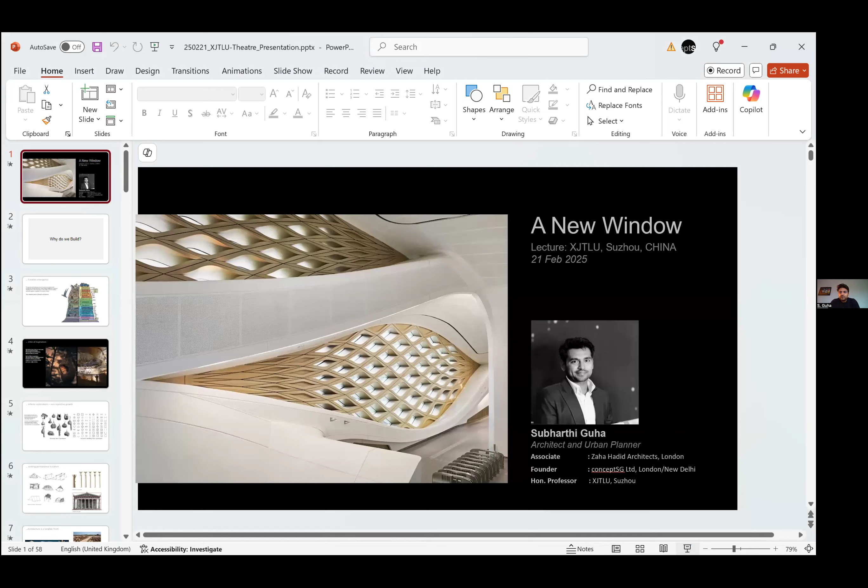Yeah, the recording is ongoing. Can you see the full screen? We can see, yes, now we can see the full screen, and it's all yours now. Okay, great. Hi everyone. I can't see them. That's very strange. You can only see me, yes. Yes. Yeah, wait a second. Let's do this way. Yeah, that's better.

Good. So hi, I'm Subharthi Guha. I'm based in London. And I think today's lecture, I prepared it for you guys, and it's called A New Window. I think the lecture should be read more as a philosophy in architecture, and that's why I've split it into three parts.

The first part is about the fundamental philosophy. The second part is about the kind of steps that engage us into architecture, and I'll show you some examples with some of my buildings. Then the last part has got some references of theater projects at Zaha.

But, and I think the target would be that none of your projects should look like that. They should look different. So I put those examples, but not going too much into how they were done.

So let's start. And I think I will start with a generic question, and this is where I want you guys to speak up a little bit. The question is, why do we build? I would like at least 2, 3 answers from you guys. So anyone can speak up.

So why do you think we build? Okay. Anyone? Anything? Just throw in. It doesn't have to be correct.

Did you hear that? Somebody said shelter. Shelter, yes, that's correct, one of the reasons. Anything else? Remembrance. Sorry? Remembrance. Memory, yes, very good. Anything else? In our daily life basis. For your daily functions, okay.

Okay, I think we've got somehow a kind of 2, 3 items, but let me try and put this together. So the genesis of architecture is not because of man. It goes back, as you said, because of shelter, because of protection against the weather, because of search of food or hiding from predators.

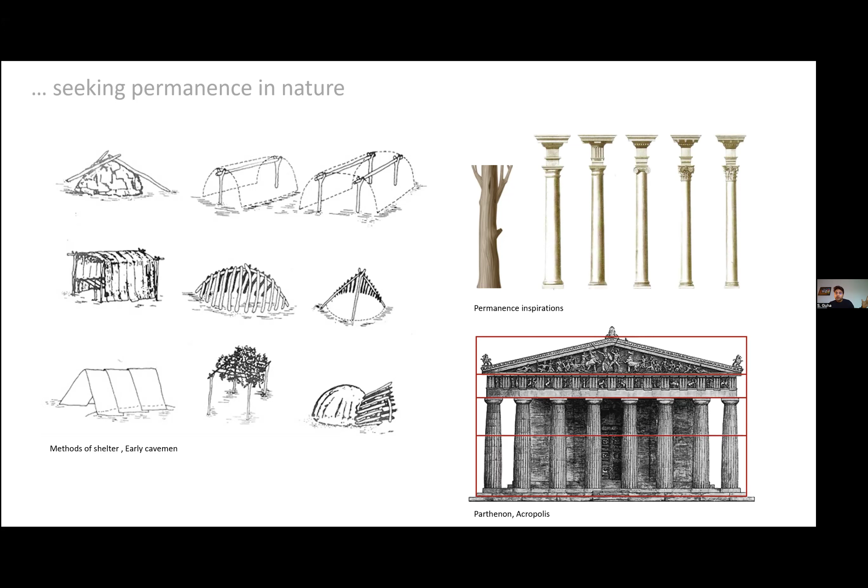So whether it could be texts or it could be architecture. There's an issue with the text. So then first go through this. Then that level of permanence came from the early forms of Greek architecture, for example, which were very much derived from wooden structures. All the designs, even though they were built in stone, you can see the designs reflected the purlins, the rafters, the sloping roof, even though they didn't need to. But it was a kind of inspiration from the transition of what they were building in wood into a much more permanent structure, which was concrete or stone.

So, why architecture? Why not just have documents and that's it? Why does transfer of knowledge need architecture? Because it is the only tangible truth. When you go visit a building, you want to know how it is built, and that knowing is there for you, and everybody who's going to come can see that. You don't need literature to understand how the structure is standing. It's quite easy that these are the logics and therefore it's standing.

However, if I had to document these in history, it can be rewritten in many ways. So if there is no tangible reality, I can write history in the way whoever is in power and whoever wants to dictate their terms. So therefore, history in the long term, let's say 200, 500 years, can be delusional. Therefore, architecture remains one of the only truths that carries through centuries our knowledge.

So this, as you can see on the top right, people took firstly a lot of effort, and I think one of you said functions, but on the left you can see the building construction, what we imagine happened in Stonehenge. But this building construction in Stonehenge was not built for shelter. So not necessarily was architecture being built for shelter, but it was built to pass on a certain set of aspirations. On the right-hand side, you can see the early city on the top in ancient Egypt called Luxor, and how the curved walls are there. Then you see a bottom image of Dieste, who is a very 20th century architect, late modern architect, continuing this experimentation in different forms.

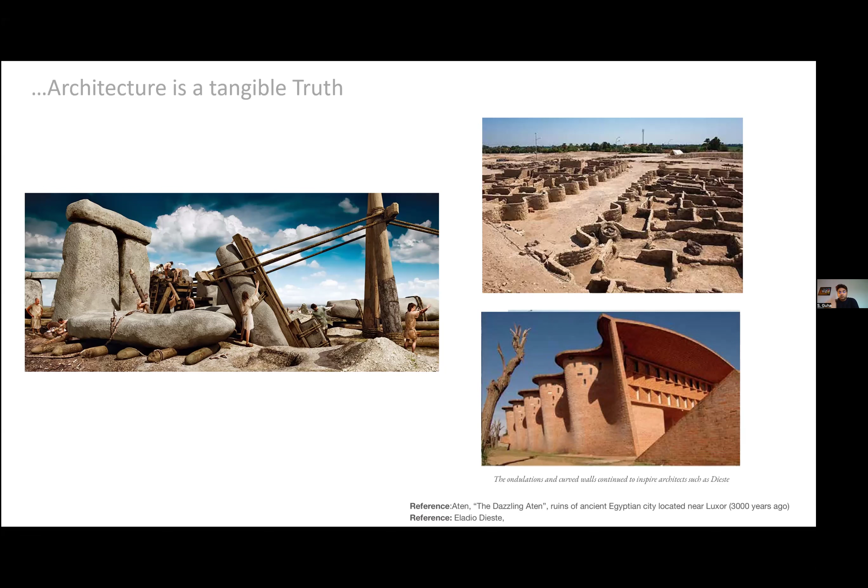But you can see the relationship, and this is across 3,000 years, you see the progress. So in between the 3,000 years, you could say there was very little progress in this typology, in this methodology. That is what I mean in terms of growth of architecture. So therefore, when you put it together, it's not just function, it's not just shelter, it's an inherent doctrine of human aspirations when you look at architecture across centuries. So that's, let's say, the first half of my talk, and hope it's making sense.

Then comes the next question. If that is the case, and if the true spirit of architecture lies in this transfer of knowledge and in this experimentation, so what are the things to look out for the spirit of architecture? And that's where I call it the pneuma of architecture, which traditionally translates into spirit. For the first chapter, which I'm going to talk to you about today, the second half of the lecture, it's about that individual spirit. What does it mean to have that relationship between space, between architecture and us? That's the first thing that you should know when you're designing.

So first thing out of this chapter is object and space. So there is, for example, if we have a site or if we have space, let's call it space, and I put an object in the space. Therefore, the object is balanced in space and I'm looking at the space. Now, for example, I move the object in the space. This changes everything. This changes your perspective of space inside there. This changes where the object is. It's the same object.

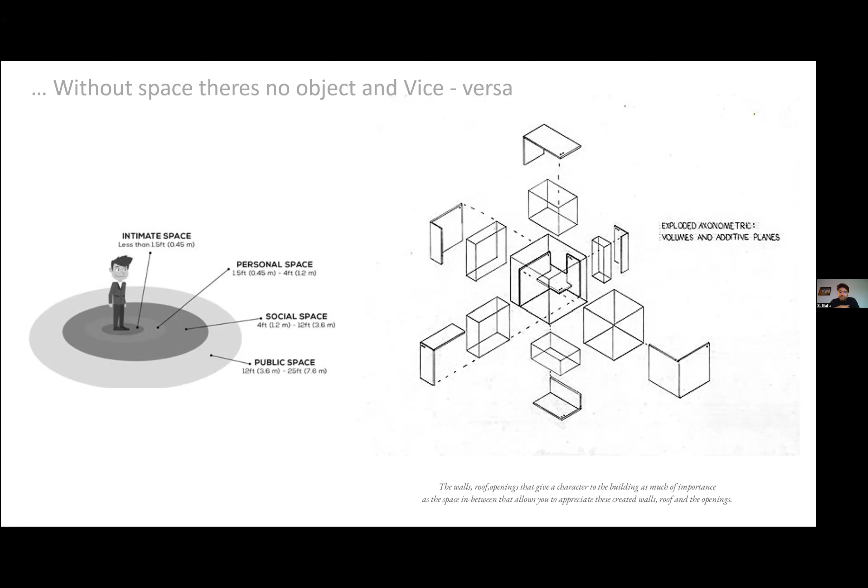Which leads to the second chapter: once you have these objects that you want to design in space, what do these objects become? The first thing the objects start to become is based on your articulation. So whatever is your articulation starts defining the object, and hence the space.

Usually there's a mistake that articulation leads to style, or is documented as style, but I don't think that's very important, what style it is. I think the articulation itself is important—the experimentation with the articulation, which gives you the form. And therefore, you would see more articulations.

So once you've mastered your version of articulation, whatever you're going to design, the next requirement for architects is the art of precision. You cannot build buildings without being precise, and this is quite important. The challenge of translating imagination into a construction and a building lies in the art of precision.

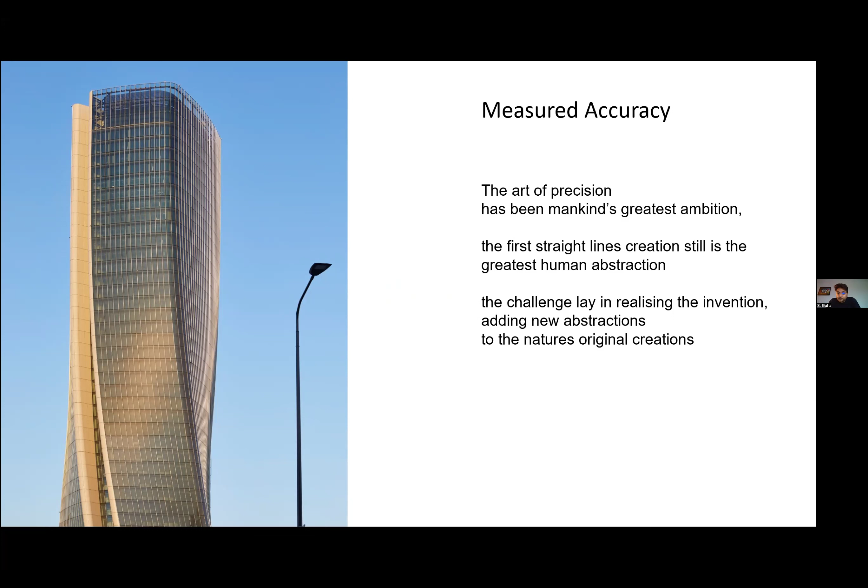I know there's a very big culture in universities to fake it, and I went to university, but I think the precision in reality is what gives you the leverage to create spaces that are for the future, that haven't been designed before, that haven't been done before.

One of the things I always say is that the straight line has been the greatest invention—it does not exist in nature. The role of the architect is never to replicate nature, but to be inspired from nature and be able to create something that doesn't exist in nature.

Moving on, I'm going to dive straight into a project in Milan that I did years ago. You can see here that we have created this tool system. First we had the design, and then we created this tool system to be precise enough and give the design more formal logic and shape. As you can see, everything is different.

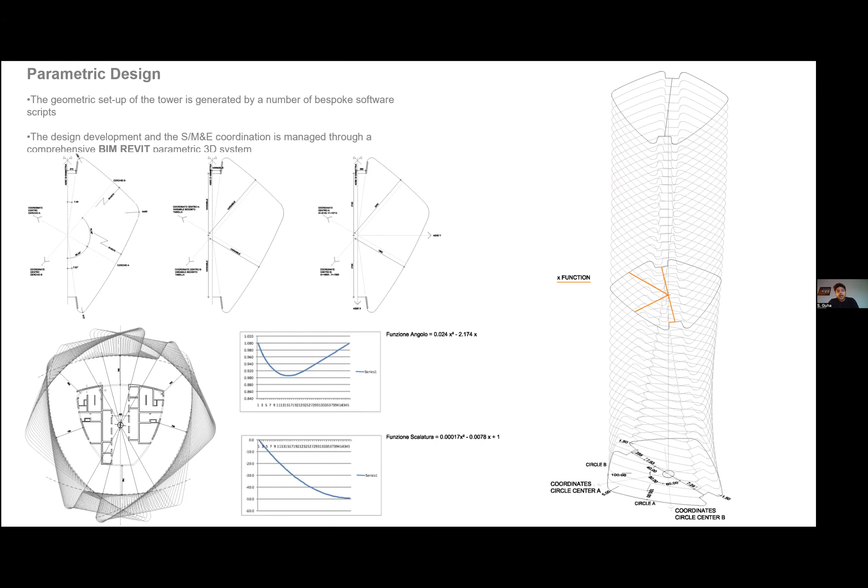And all of this was generated by a tool. So you can see here, this video tells you how these curves were plotted, how they stack up, and how the curves are generated for the floor plates and so on.

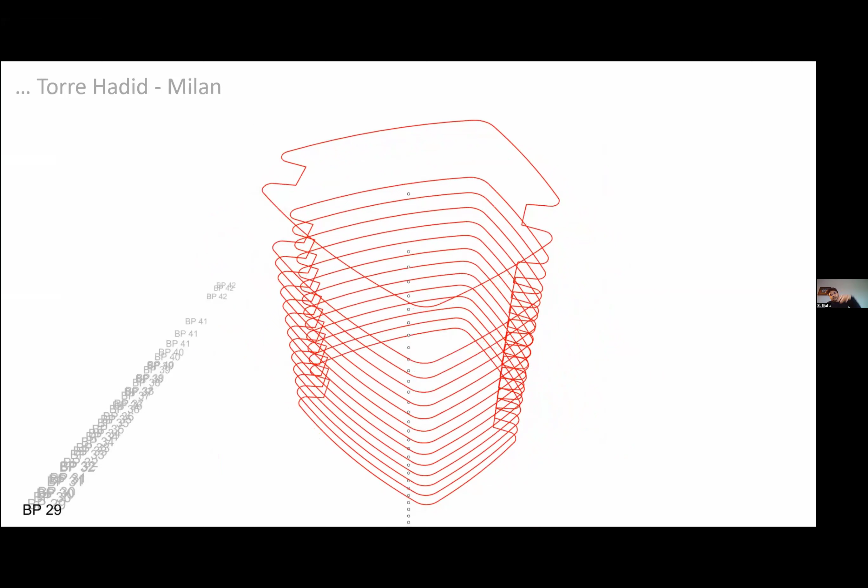I'm going to move a little bit fast—it's a long video, but you can see the center point, and as soon as these floor plates are developing, the division of the facade here, the optimized division, how much you can make it more economic and efficient for the glass panels.

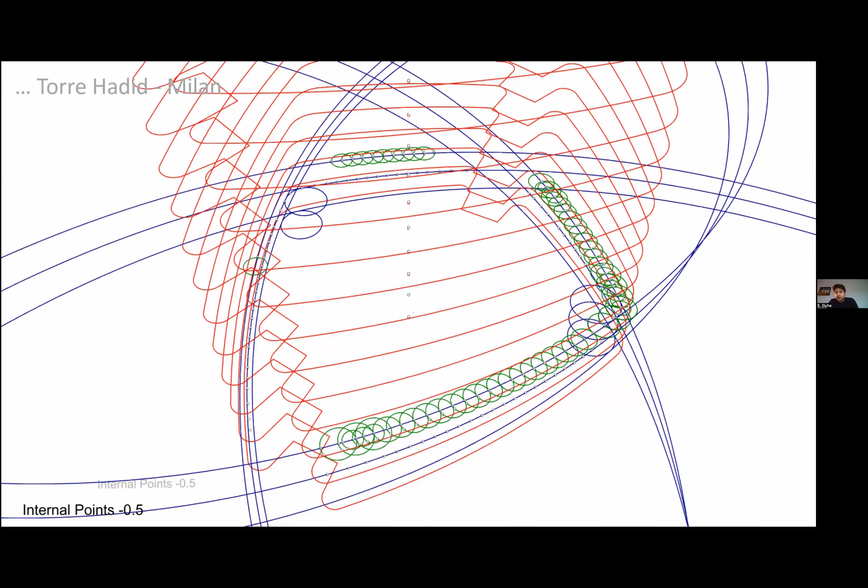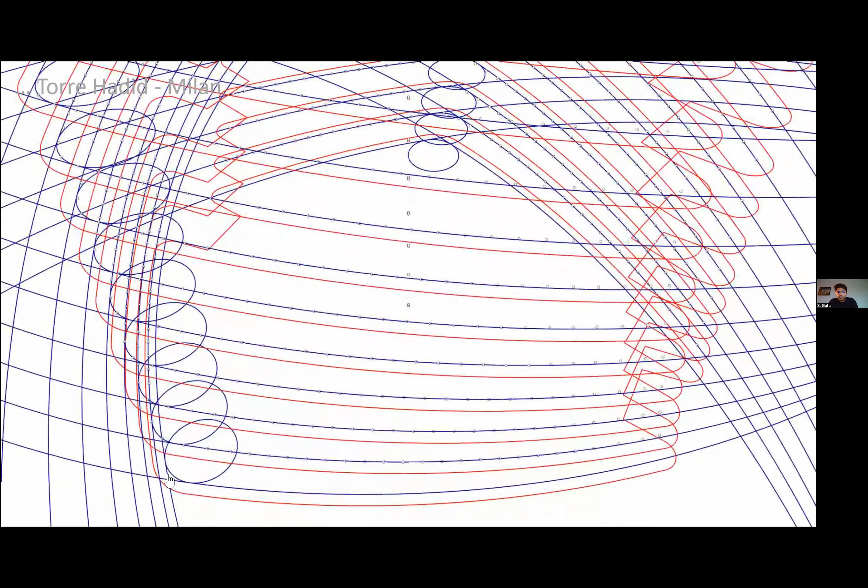This gives us—we don't have to worry too much about the numbers it's throwing out, as much as we need to worry about the logic. If your logic is true and clear, the numbers can get way more complex. I think there's a video that's getting stuck a little bit.

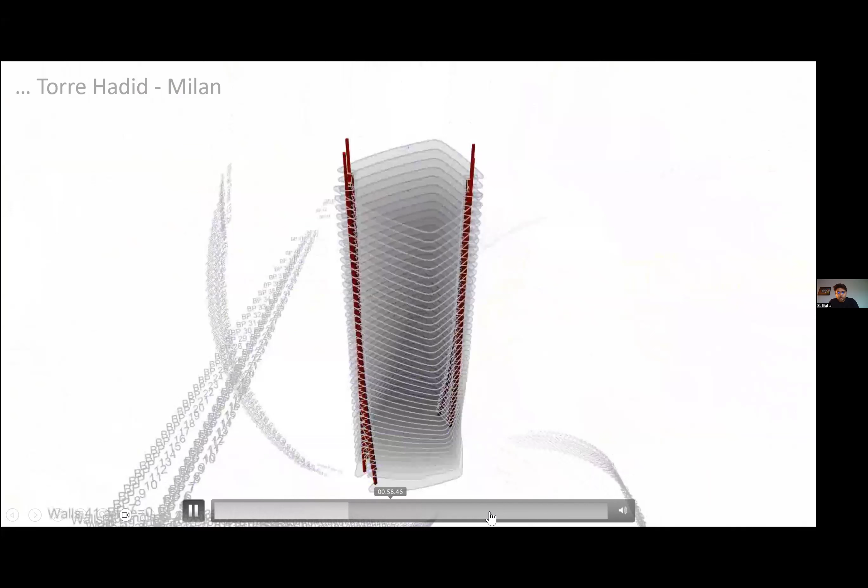Okay, sorry about that, but ideally I want to show you how this progresses.

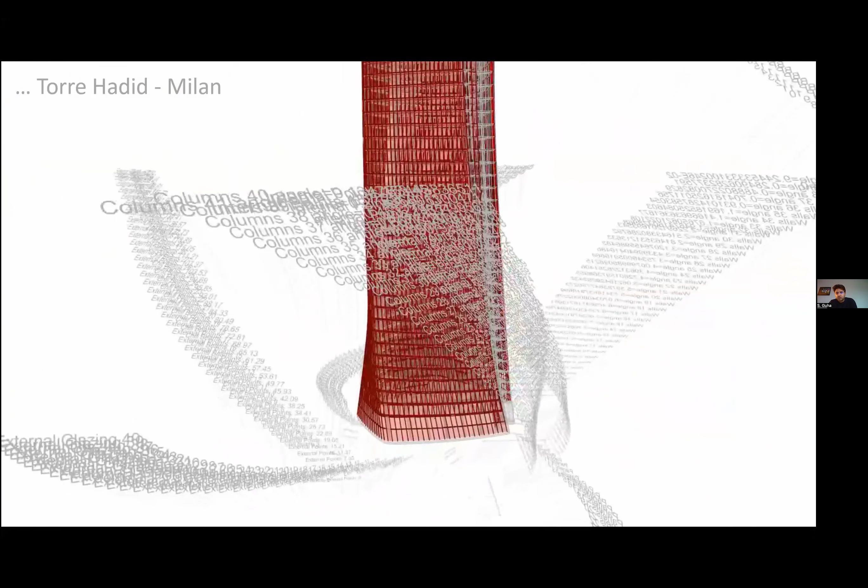You can see the columns are straight floor to floor, not twisted, which gives us the outer scale. You can see the bunch of numbers coming out - you could not possibly do this manually. There's a double layer glazing system, the fixed system and the ventilated system on the right, which is open.

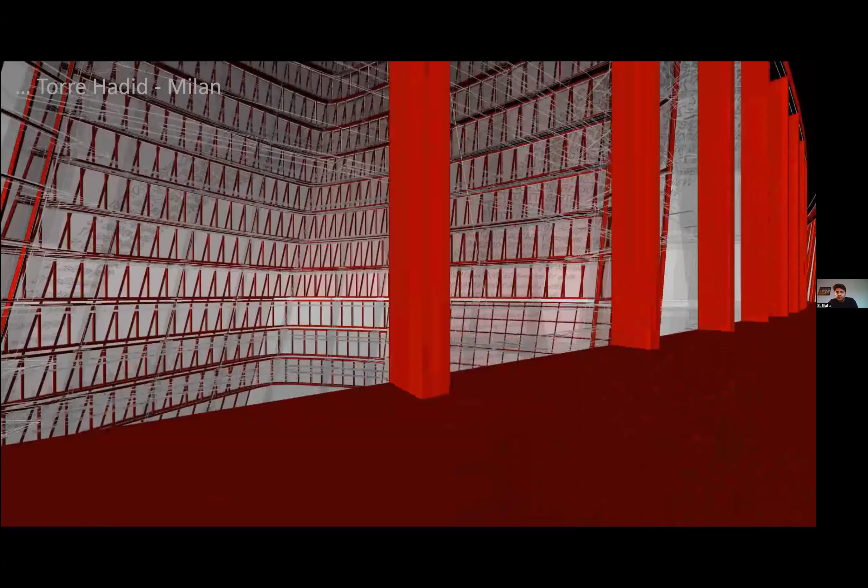This gives us the overall logic to build these kinds of buildings. And of course, this building's twist was not just a whim - it was based on a linear axis in Milan that terminates at this footprint, and then the axis disappears into the sky. That was the initial concept of how it started.

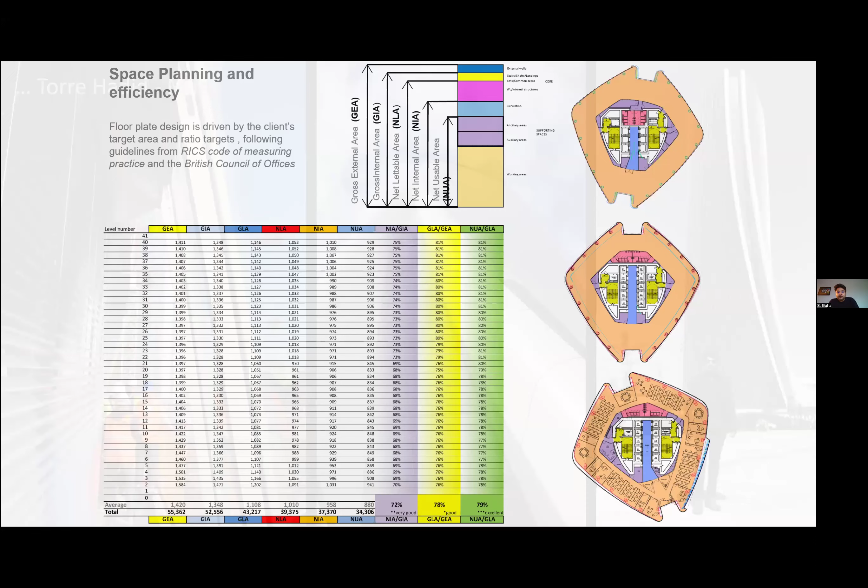Moving on to the next slide - once these areas and so on come out of the system, it makes our lives easier so we can focus more on the design, making sure we're getting the right product. These kinds of logics then get applied across different designs, but not in exactly the same way.

Coming to the final conclusion, the second part of this lecture is what I call a new window - this is what the lecture is titled. I think finding a new window as you become architects is the first principle. If I had to pick one thing to advise, it's how do you find a new window. By new window, I don't mean an actual window - a new window is a new window to your vision.

Let's analyze quickly one of the old buildings called the Pantheon - I'm sure a lot of you have seen it. Before the Pantheon, there were many domes built, and the compression structure of the dome sits right in the center, giving it stability. This was removed from the Pantheon to give this window - call it the oculus - this window its natural light, the experience of central light coming in naturally, rain, light, and so on.

So that little philosophy had to be improvised to find different solutions for how you could build a dome without this central keystone, which led to having thicker walls, as you can see here - thicker walls of concrete. The dome was built in concrete, thicker walls at the bottom, thinner as you go up, so you taper, you redefine structure.

So the new window, or in this case literally a window - but generally, if you have a new aspiration, it defines everything else, from structure to philosophy. You can see in the picture how the light and the position of these articulations move more and more up, so when the shadow falls, you get deeper shadows at the top and lighter shadows at the bottom. It's all about the experience of space.

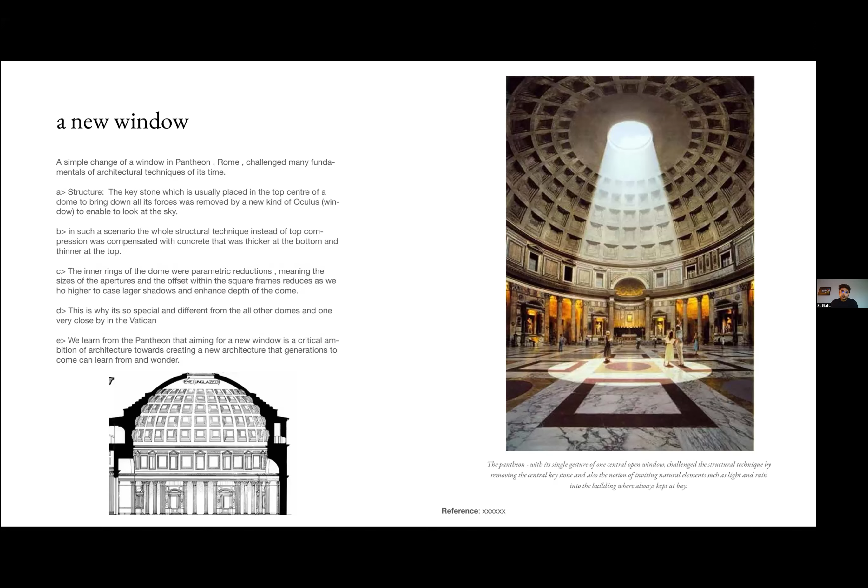So I want to show you a couple of projects in a little more detail, and explain the differences. This is a new project opened in December, but I worked on it for a very long time - I've shown this many times before.

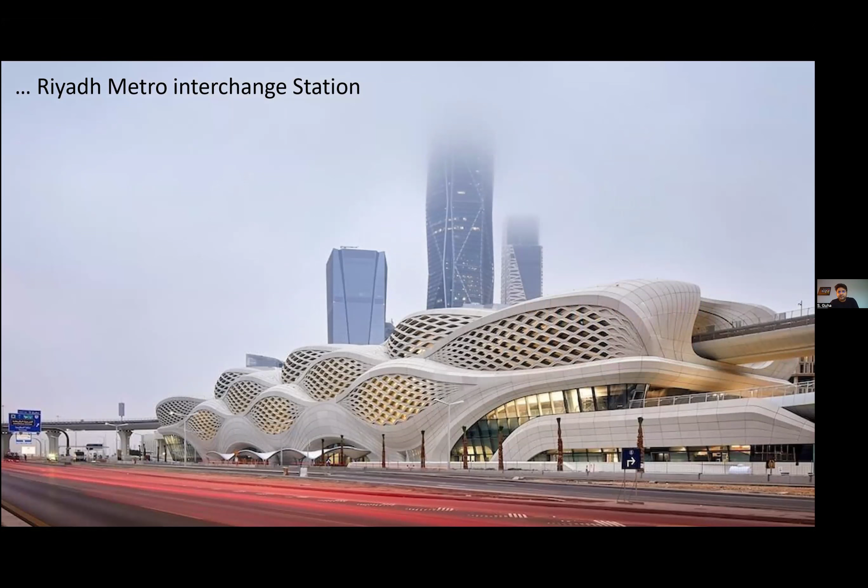This is in Riyadh Metro Station - here you can see the articulation that creates the outside and the inside, and this whole technology of how you make a window which is not in a wall, which is part of a diagrid, a steel diagrid, and then you design a new system that gives you this effect.

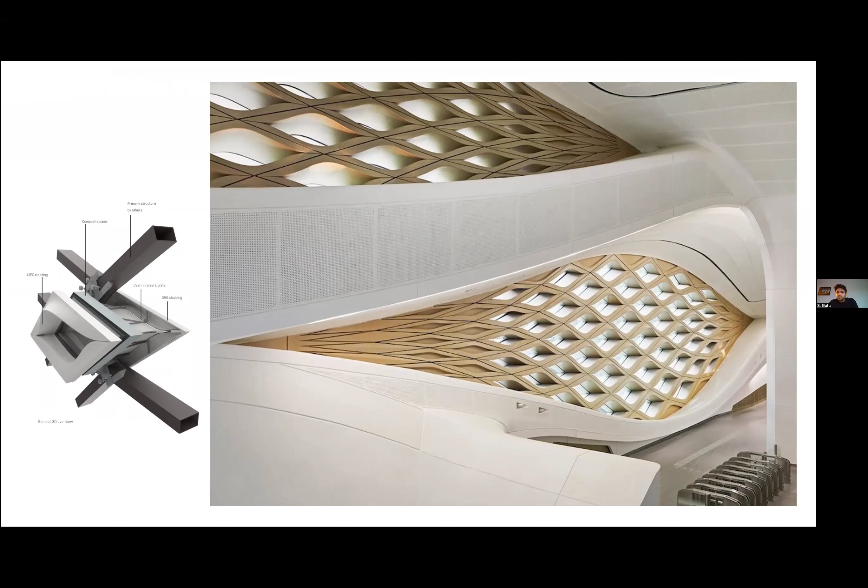Of course, it's a train station - briefly, it has the metro line going here, the entrance at the bottom, the transfer level, and the airport line on top. The site was very tight, and that's why you see these bulges coming out, to make enough space on the interiors.

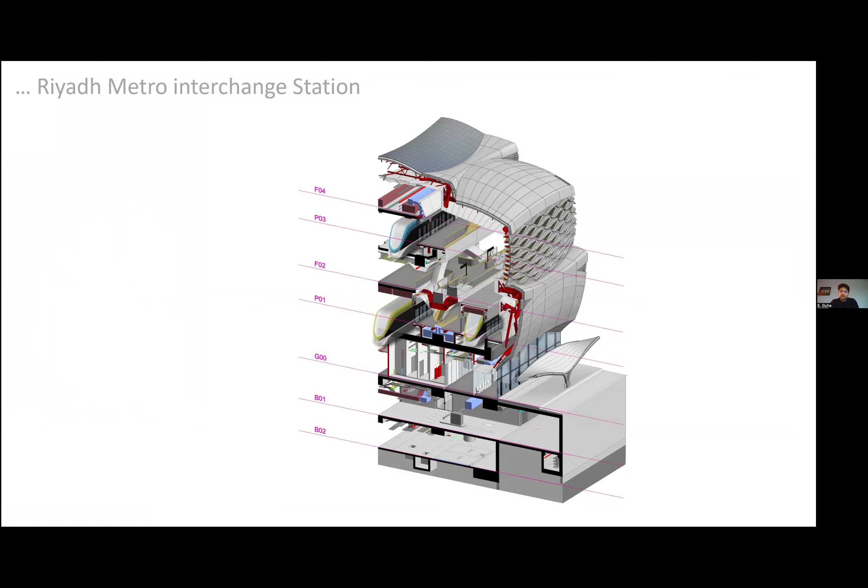The second thing we did is we removed vertical structures here and made them inclined so they can combine with the escalators. Once they are combined, you have more efficient space, and you get more double height so it doesn't feel very cramped.

And therefore, you see some of the actual pictures. But here again, you see the precision. You see the geometry has been subdivided to make it into smaller pieces. Then they're charted, they're documented. This is the background knowledge that goes into this kind of building.

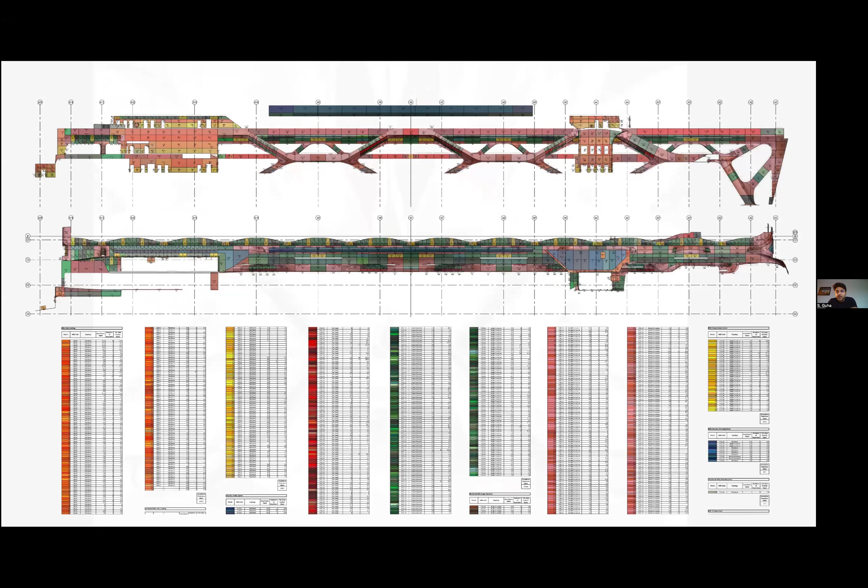And you can only do this because it's not been done before. So to do things that have not been done before, you need to find your own ways on how to make it work. And here is the result. This is just before the opening, and it's very successful, a train station.

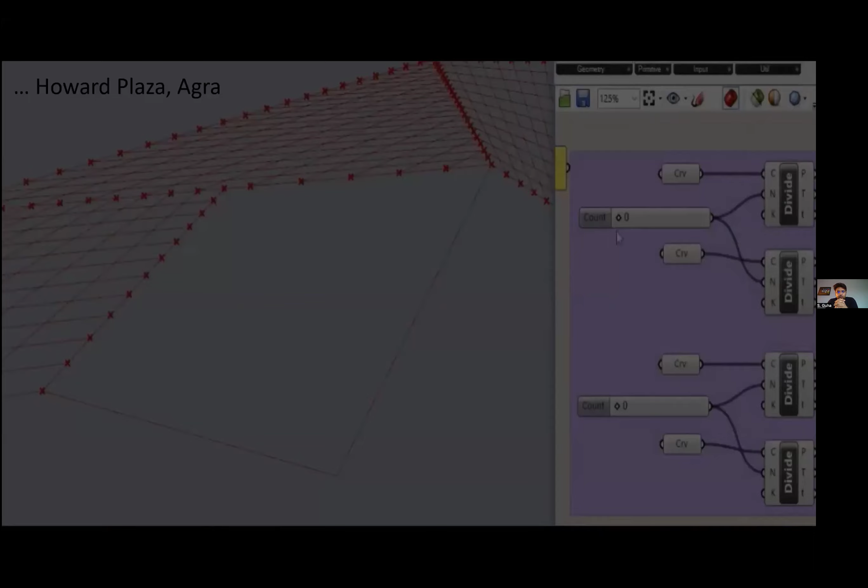So now I want to show another building that I did for my own company. We look for constant inspiration in nature, studying the continuity of its curves and the complexity of its surfaces. Translating such forms into buildings is a challenge. High-end computation can make it simpler to analyze and construct around the world.

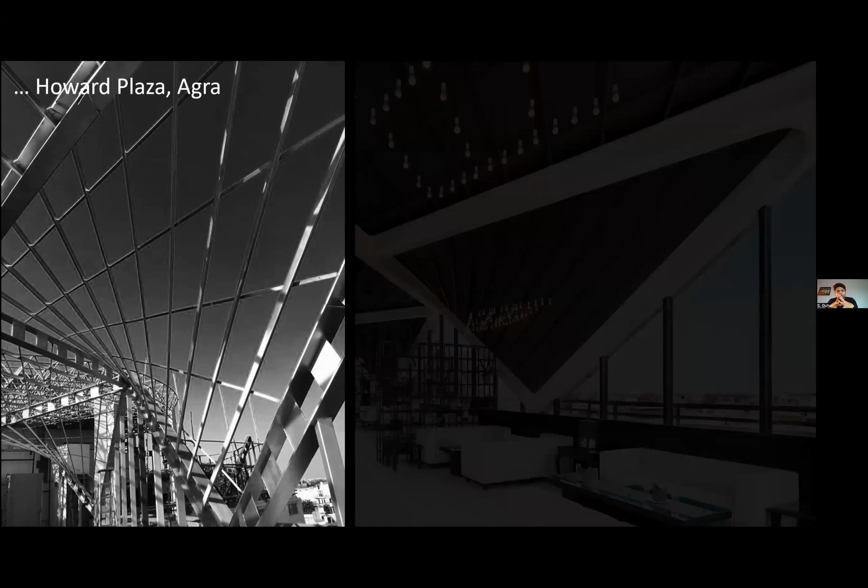Forms with structures that are proud to reveal themselves. Forms that create new lived spaces. So this is one of my other buildings, but I want to share with you that this goes into the logic where structure and form is the architecture.

Yet at the same time, it starts by creating that new kind of window. And you create this architecture in a way that it is pure in the way it is. There's no false ceiling, there's not too much going on. And obviously the tool helps.

But even sometimes, for this project, I give you an example because this was done in India, we had all the tools to make it work. We could highlight every position, every node had its own point, geometry and coordinates. But we found it easier because this was being built on top of a 5-story hotel building, and the labor was not that skilled at the time.

This was done over 10 years ago. And sometimes, what we did is we asked them to build a thread model. So the laborers went on site and did a thread model because these are all hyperbolic surfaces. So they could draw straight lines to create double curvature on thread. And once they did that, you didn't need to tell them much how to build it anymore.

So we talk a lot about construction drawings, and we talk a lot about digital technology, but I think sometimes building new architecture is also about communication. How do you communicate to people who are executing?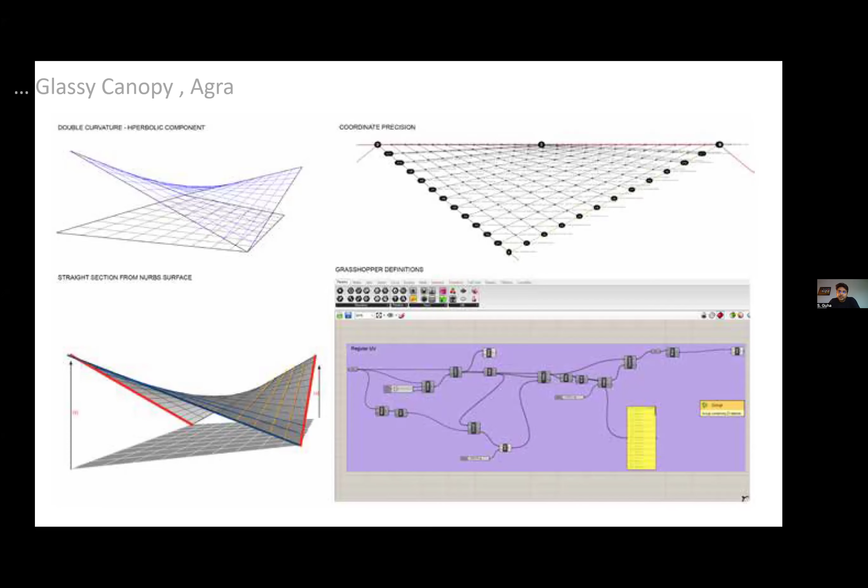And that brings you to another new window. So here you can see it's a window to the city. It's a framing - very close to this is the Taj Mahal, which is a world wonder. But then you can see it from the left corner. The idea that the structure, the facade, the building, is all one is another way of looking at things.

So saying that, I will close this lecture with the last layer of references of theater, because I know your subject is theater this year. I hope you will not design anything that looks like any of these theaters that I'm going to show you, so that we can see a new window from you guys.

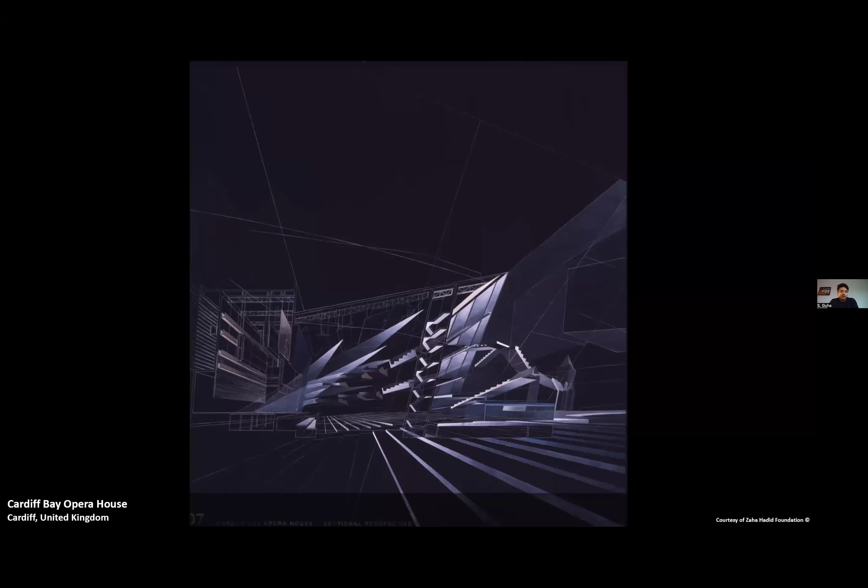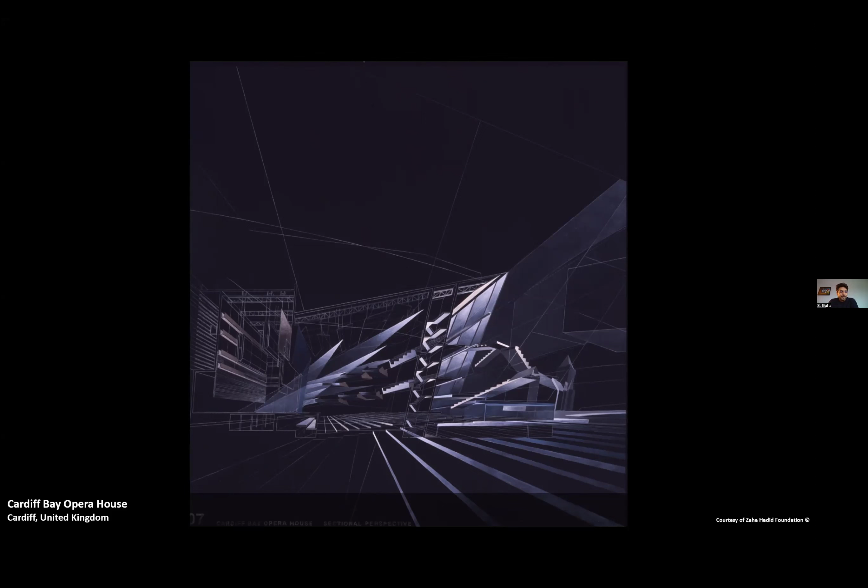Just a little bit of history of Zaha Hadid Theatres: we started the Cardiff Opera House, which we won the competition 3 times but never got the commission. We won it first, it was rejected. We won it second time, they decided to host another competition. We won it the third time, and finally they just gave it to someone else. But here it is - a very important milestone, because even though we never built it, it was part of the recognition in the early 90s.

These are some of the forms. After that, there are different kinds of theaters that are smaller, temporary. This is a Bach Chamber Music Hall that we did in Manchester. It was a small event inside the main event, creating a temporary space, and how to make the space in the space become a volume in itself.

Then obviously this Los Angeles show, there was a lot of music and a small stage setup, going on to something like the Performing Arts Center in Abu Dhabi, which was another competition we participated in, in the early 2000s. We are trying to get new design, obviously a lot more fluidity into the internal spaces to make it seamlessly integrated. These started to change the repertoire a little bit, which then led to, as you know, the Guangzhou Opera House.

Moving on, obviously a very recognizable building is the Heydar Aliyev. And here is an auditorium inside the Heydar Aliyev, which I quite like. It's very simple, very neat, one material only, not too much. Call it monochrome or whatever, from the steps to the seating to everything is in wood.

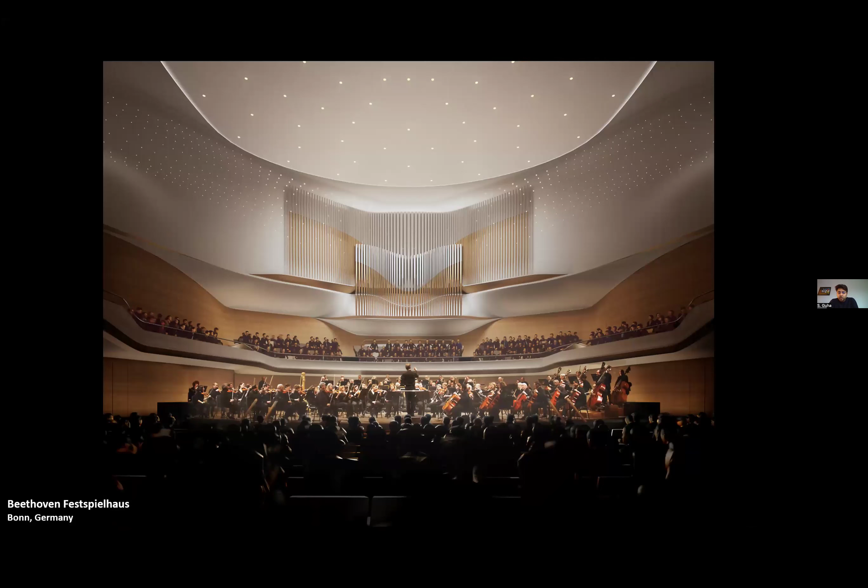Some other buildings, this is the auditorium in Nanjing for the Youth Olympic. Some other views, Changsha, this is built as well. You can see different language. This one is in Bonn, Germany, and you can see a different language for the theaters here. It's another perspective of a different mood.

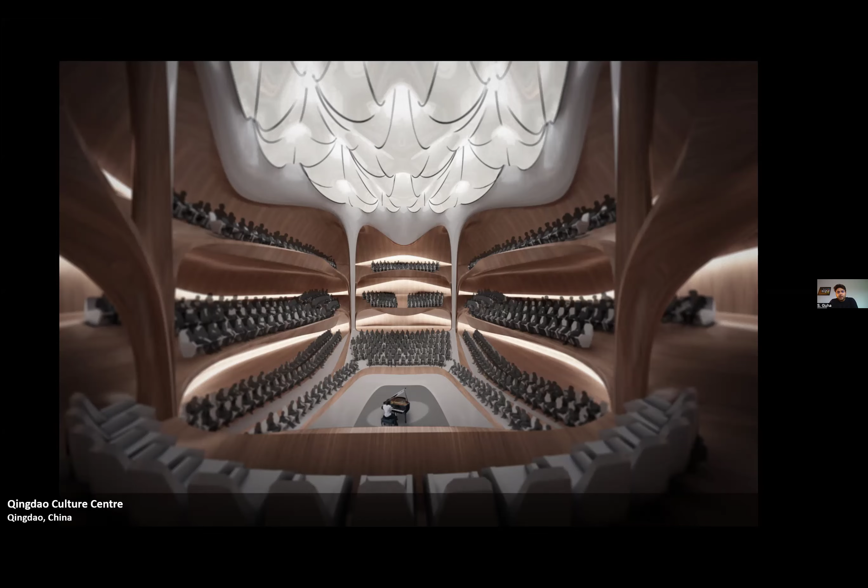Cultural center in Qingdao. And culture and art in Amman, in Jordan, that we designed a long time ago.

Bogota. So there's obviously a lot of repertoire of work and design that are constantly being experimented. Most of them, not all of them, haven't been built. As you can see, some of them have been built, but the idea of finding new solutions is constant.

I hope in this group of 15, 20 people, you are able to create some new ideas. It doesn't have to be perfect at this stage, but I think the first initial start off should be something that you are inspired by, that you can think you can bring into architecture, rather than looking at architecture to replicate it. I think that's the message.

Let me stop the screen sharing. What is it?